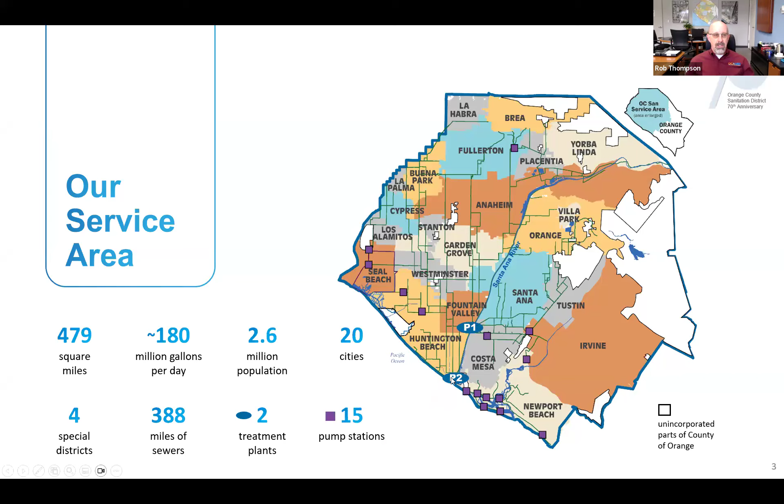But in general, we collect about 180 million gallons per day from 479 square miles. We service the 20 cities you see here, 4 special districts, which are Irvine Ranch Water District, Costa Mesa Sanitary District, Midway City Sanitary District, and Yorba Linda Water District. We have 388 miles of sewer. These are generally going to be the bigger pipes, anywhere from 18 inches all the way up to 10 feet in diameter. We have the 2 treatment plants here in Fountain Valley and in Huntington Beach. And something that we probably don't talk enough about, one of the most important assets in Orange County, our outfall, which is a 5-mile long outfall, which allows us to make sure that brine that we're now making from all the reclaimed water is safely discharged and maximizes our ability to reuse the water.

Again, a little bit closer view of our facilities. On the extreme left, you will see our new headquarters area. This is the nighttime rendering. It is nearing completion. For those of you that get a chance, probably in the summer, good time to stop by and see the new building. It's a mass timber structure. It's going to be beautiful and very, very effective. We saved quite a bit of money with the mass timber construction, actually. It's much lighter than concrete and steel, so we saved significantly in soil preparation and foundations.

So both beautiful, warm, and efficient. But the heart of what we do are treatment plants. As many of you already know, our Fountain Valley plant is here shown bound in yellow, and the Orange County Water District is right here co-located. We share a campus. That's part of our cooperative nature together.

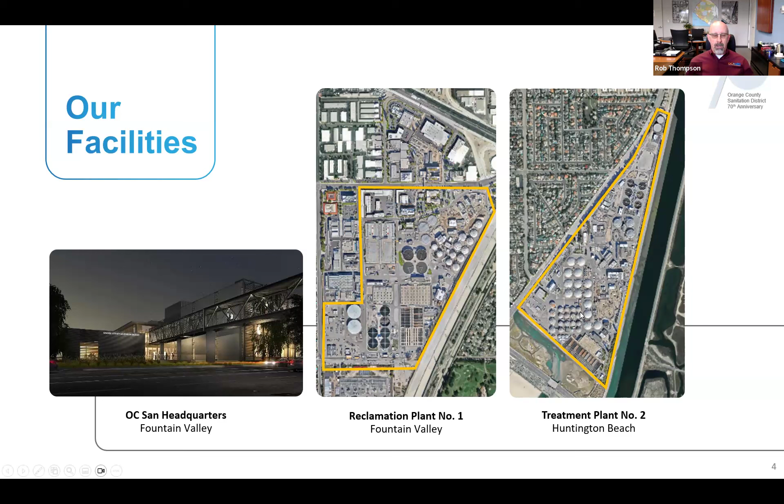Plant 2 in Huntington Beach is right here. It's about the same size, different shape as Plant 1. They're both about 100, 110 acres. Both treat about 320 million gallons of wet weather flow for a total, if you do your math right, 640 MGD. And our 2 outfalls can handle that, along with our 3rd outfall, which is the groundwater replenishment system.

So our first job, what we started as an agency doing in 1954, and really as a joint outfall sewer agency from the 1920s, was protecting the public health. That is job 1 for us. We make sure all of that biohazard, all of that sewage stays out of the streets, stays out of the rivers, gets to our plants, gets treated, and safely discharged.

Now, over time in the 1960s, environmental movement kicked in, Clean Water Act. We expanded to becoming protecting the public health and the environment, something we take very, very seriously. We have been providing Class A beaches for years. I've been here 28 and a half years. Since the 1990s, we've had A ratings on our beaches, really past the 2000s.

Beyond public health and the environment, we're now really moving into maximizing water reclamation and resource recovery in general. But water reclamation, as you heard, our partner, the Orange County Water District, we work hand in glove together. All the water that we collect, we're working hard to make sure it's reclaimable and made available to OCWD. We work hard to make sure we're a good partner, meaning the water quality we provide them is consistent.

It matches their needs when they're running their membrane filters and the different flavors they have. Our consistent effluent is the key to them having good success running those filters. So we take a lot of time and effort to do that. And it is the largest plant of its kind in the world, and we're happy to be involved. You can see the pictures of the general managers over time that really made the thing work.

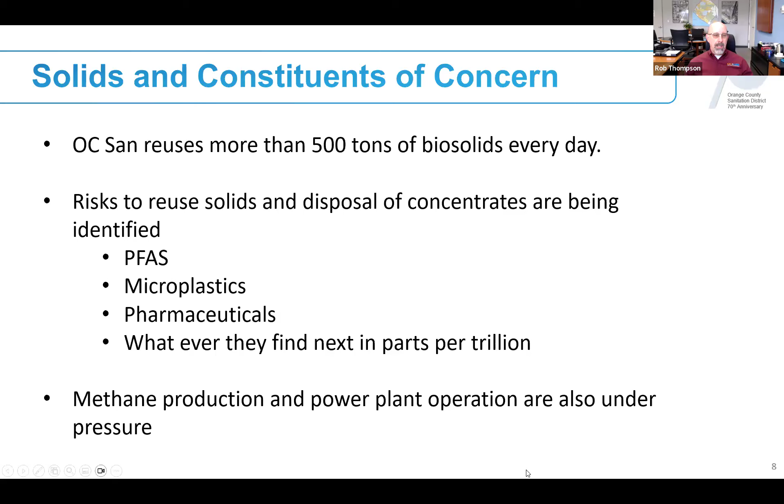First thing we try to do is source control. We have a fantastic source control program. The best way to have something not in the wastewater stream is to never let it in the first place. So our source control folks are always sampling. When we find a constituent of concern that's high, out of the normal bounds, they're great sleuths. They do their sewer detective work, and they work really hard to identify where it's coming from and then work with the dischargers to make sure that that's limited.

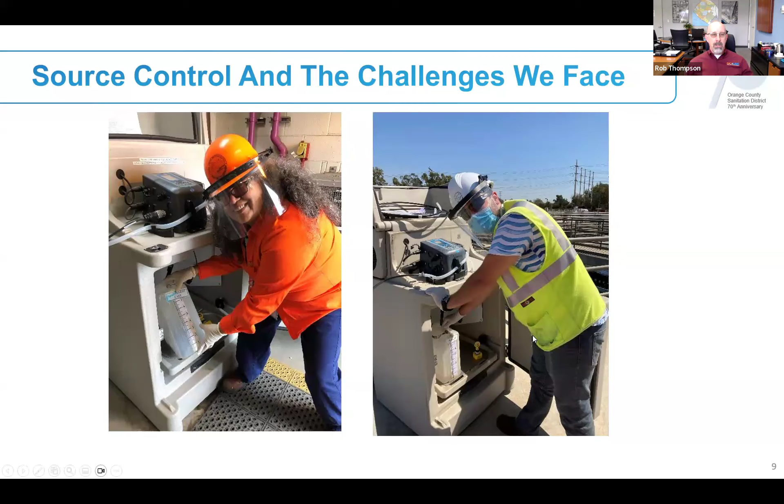It's something that we really kicked up over time when we started GWRS, especially because we understand that their work is not only for ocean protection now, it's a function of public health, making sure the water we drink is safe. However, there are certain things that no matter how hard we try, they're going to come into the sewer, and we need a paradigm shift.

I think everyone in this industry has kind of grown up from the 1960s forward, hearing the old slogan, the solution to pollution is dilution. Well, I am here to challenge that tried and true notion and say that the solution to pollution is definitely not dilution. I think going forward, the solution to pollution is concentration and destruction.

So our job, I think, going forward is going to be to find ways to concentrate whatever these constituents of emerging concern are, these health hazards that have been identified or are concerns, and destroy them. We can't just stay in the business of moving them around. So taking PFAS, putting it in some sort of media, and then sending it away. The point is, I think the industry is going to come to the conclusion that there is no away.

For us, biosolids tend to be one of those sticky substances that microplastics and PFAS stick to. We see some concentration there. So that's why OC San in our work program is looking for a way to take care of that concentration of either microplastics, pharmaceuticals, and or PFAS, and destroy them. So how are we going to do that? I'm so glad you asked.

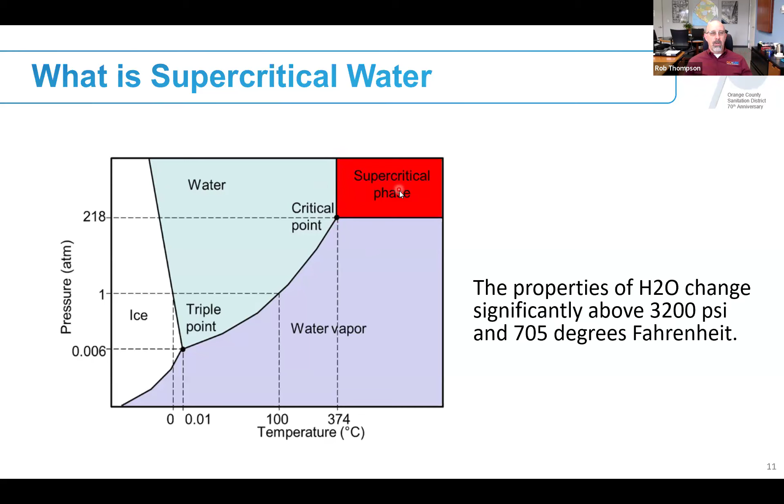So the machine we're going to trial looks something like this. First step is you have an air compressor. The air compressor, very standard. Yes, it's high pressure, but it's not exotic. It's not very difficult to find an industrial compressor that can go up to 3,400 pounds per square inch. In fact, if you go to Home Depot and go to the aisle where the pressure washers are, it costs you a couple $100 to buy a 4,000 PSI pressure washer.

So we compress some air. We put it through a heat exchanger where we're going to take heat that we've created by oxidizing the sludge or organics that we're talking about. So this is free heat. You end up with this hot pressurized airflow that goes to this point.

Separately, there are some pumps that pressurize the organic, either biosolids or raw sludge or food waste in our case. Take that sludge. It's still relatively cool, no big deal. We like that because sludge is super complicated, and trying to heat up sludge over time will turn it into tar and get you into problems with viscosities and how it moves. So suffice it to say, compressing sludge, no big deal. I do that every day. I take my biosolids, put them in a concrete pump just to pump them to my truck loading facilities, as many of you know. So a few thousand PSI for wet sludge, not a difficult proposition.

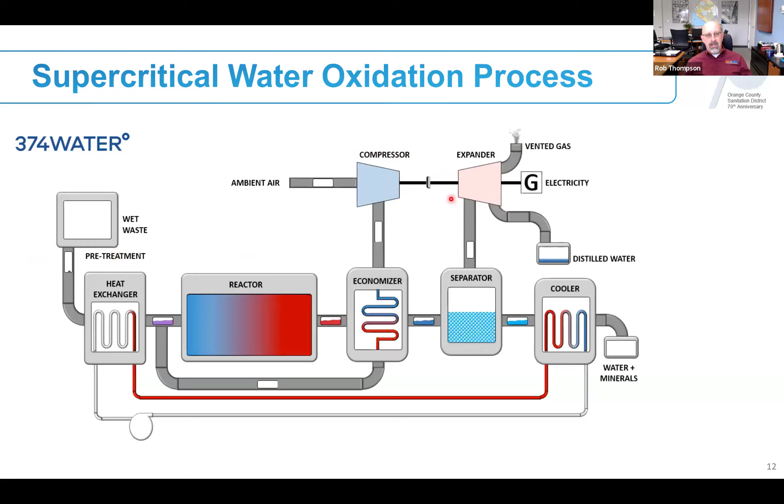So that's how the machine works. I know it took a lot to say it, but it's really, in the end analysis, pretty simple. Air compressor, sludge compressor, expander. Those are the big moving parts.

The question is, well, what happened to all those nasty things that might have been in the sludge? You had PFAS, what happened to it is a big question I'm asked. So if you take PFAS and you run it through this, you will end up with CO2, because PFAS is really a carbon fluoride chain. The carbons will break apart, combine with the oxygens, you'll get CO2. The fluorides will break off, and you'll get calcium fluoride. So calcium, very prevalent in the mix.

For the real chemistry geeks in the crowd, if you think about your periodic table, all those 2 columns, 3 columns to the left side of that periodic table, your alkali and alkali earth metals on one side are going to combine with your nonmetals and halogens on the opposite side of the chart to make a bunch of salts. So as you look down this chart for products, you'll see a lot of salts, for phosphates, for sulfur compounds, for fluoride compounds. You'll also have nitrogen gas coming off.

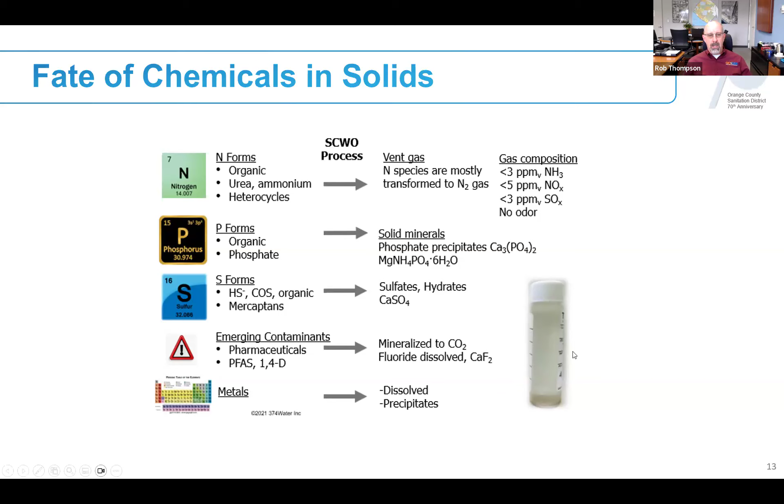So the process is very efficient at breaking up ammonias, very efficient at breaking up fluorine compounds, PFASs, pharmaceuticals. This machine just sees them as fuel. Microplastics, no big deal. That's just carbon hydrogen bonds. So you'll end up with carbon dioxide and water. So you end up with a pretty clean water compound with some salts sitting on the bottom of the beaker.

So what's our machine physically look like? The machine is being constructed, and it's actually being tested in Indiana right now. So this first set of views is the sludge preconditioning. Sludge is an incredibly difficult media to work with. Even in today's world, we spend an inordinate amount of time working on our solid systems, whether it's centrifuges, digesters, truck loading systems. It's a very gritty, difficult to handle material. So we spent a lot of time making sure that our system would be able to handle the contaminants that we're dealing with. There's all sorts of, use your imagination, latex products, sand, pebbles, grit. It's a very difficult medium to work with.

So the first thing we do is grind everything. There's a macerator in the corner. After everything is all ground up, we put it through a screener. So the sludge will come through. There's a fine screen. It'll let through anything less than about 2 millimeters. Anything bigger than 2 millimeters falls in this diaper genie. Or if you're a purist, it's an endless bagging unit, but I prefer diaper genie. Keeps the odors down. The sludge then passes through to this holding tank.

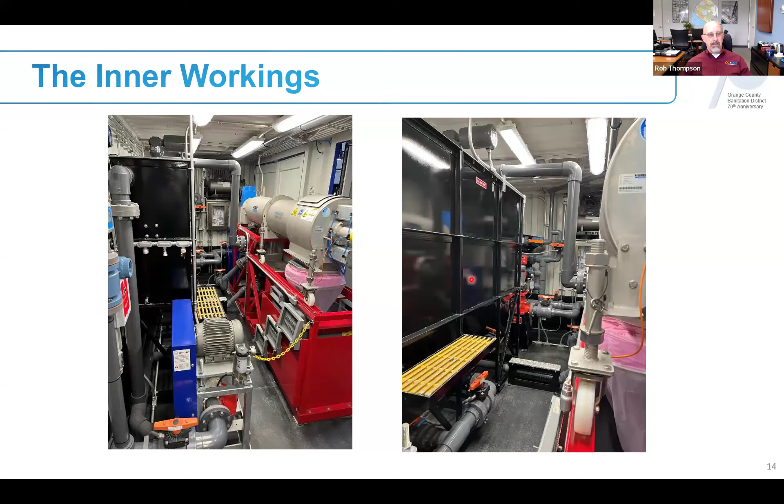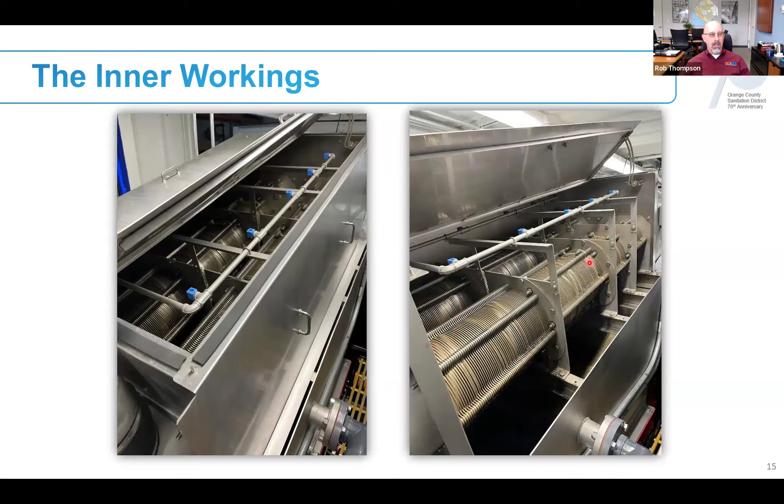Then we go to a screen press. We compress the sludge up to about 16% solids. So it's 16% solids, 84% water. And then we ship it over to our second container, which is where the magic happens. So this loop right here is our reactor. It's a very complex piece of equipment, which is basically a pipe going around in a circle. These items on the side are those heat exchangers that I was talking about. They're basically pipes within pipes, very efficient, straight pieces, prevents a lot of plugging issues.

Very simple layout, very simple idea to get done. Where 374Water is really providing their know-how is in how it's all controlled, the geometry of how things are put together and mixed. A lot of work has been done. They've learned a lot in the past year and a half in how to build the machine to run effectively and efficiently. And I am here to say that I'm very pleased with how this is going forward. And we expect to see the outcome very soon, which I'll show you in a minute.

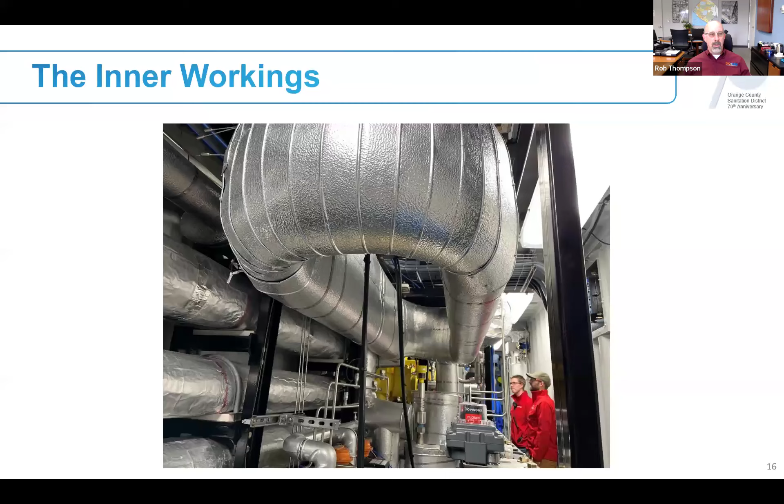The output looks something like this. This is the actual output of the unit right here. So the water's coming out. This was a video clip, but you can see that sandy, salty material down here at the bottom of the sink. They caught a cup of it. So it's water with these floating salts and precipitates. It looks very rusty because West Lafayette, Indiana, which is supplying the feedstock for them to test with, is similar to OC San in that it uses a lot of ferric chloride for enhanced primary treatment. Works great for us from a process perspective and just becomes a nutrient in the salts that are left.

So this salty stuff that will be able to settle out, we think, pretty readily, will be high in potassium, it'll be high in phosphates, it'll be high in iron. So there's no reason to believe it won't be a pretty good fertilizer. It'll be totally devoid of anything alive because at 3,400 pounds per square inch and 750 degrees Fahrenheit, not too many biological things will last. So it's a great outcome for us. This handsome gentleman you see here with his hand in front of what feels like a dryer vent, this is the warm, moist air coming out of that expander area.

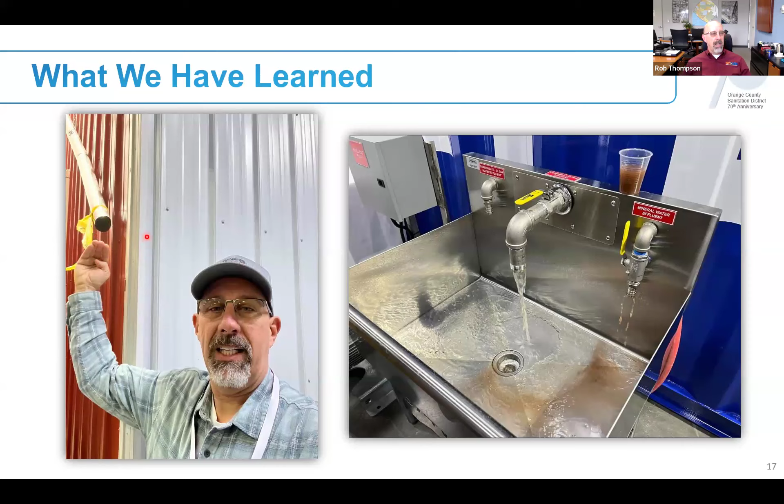So does it work? Yes, it works. This is a couple of beakers. This is what went in. This was the original SCWO testing at Duke University on the original 1-ton unit. So OC San sludge, I think this is actually biosolid, so it's even better than sludge. This is OC San biosolids, and this is the effluent water that came out.

We had to do AQMD testing because South Coast Air Quality Management District wanted to make sure that what we were doing just didn't put PFAS into the air. They wanted to verify destruction, and they wanted to verify that what was coming out was safe. So we looked at NOx and SOx and all the things there, and got very, very promising data. We submitted that with our application and received our permit.

So we're very, very bullish that this is an opportunity for us if we can make this work with 374 Water. It's a solution to microplastics. It's a solution to PFAS. It's a solution to pharmaceutical products. This is a way for us to morph away from digestion, maybe in the long term completely, or to augment digestion. We're still figuring out what the right way to utilize this technology is for OC San.

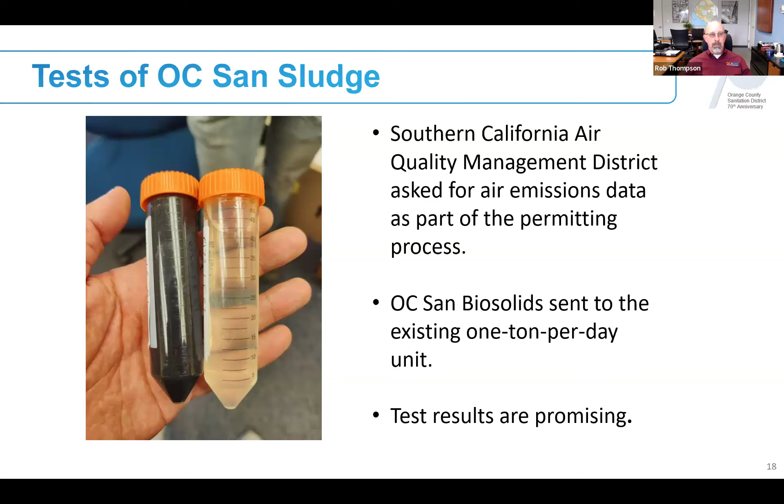But the upside is it solves a lot of the problems we may be facing in the future. So we're very, very interested to see how it's going to perform and how we can modify our process with this new tool in the toolkit.

The project budget is about $8 million. It hasn't really moved much. We had a couple of extra change orders on the site prep. It's noise, a couple of percent. But in general, we're at that $8 million investment. We're very happy to say and thankful to Congressman Lou Correa for partnering with us after the fact. He earmarked some funds toward us for a little less than $3.5 million to help offset.

But OC San is so interested in making sure we have a way forward that we're willing to invest this money and show the industry that supercritical water oxidation has promise and could be a part of the way we all move forward. Certainly, OC San is looking at it as a way for us to move forward with all the constraints that are coming on biosolids and methane production.

The site has been prepped. We're ready to go pretty much. We're waiting for the units to be delivered. 374 Water, I talk with them about every 2 weeks now. They are in the process of doing their commissioning tests. They're making a couple of modifications based on their latest learnings, but we anticipate in mid-March they should be moving toward their factory acceptance testing, where they run it for 48 hours at its designed capacity.

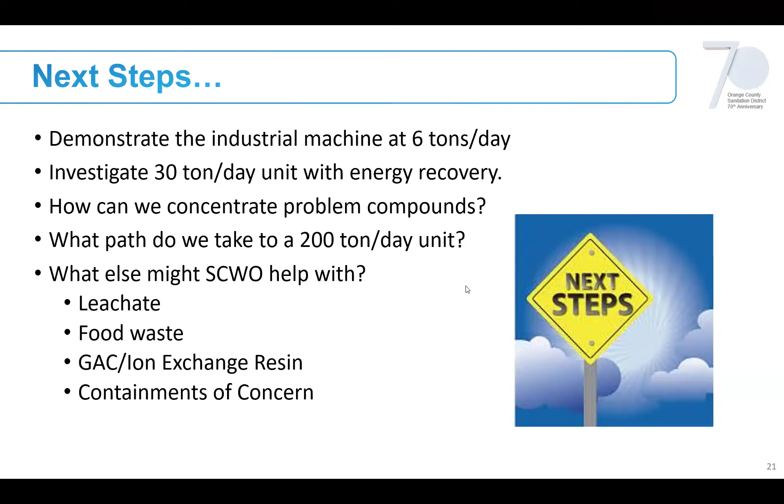Thank you, Rob. I've got a handful of questions related to cost and energy consumption that I thought we could tackle together. Do you have a sense of, is there a difference in costs based on what maybe a current process is versus the supercritical water oxidation process, or what are those costs? And then if you could talk a little bit about energy consumption as well.

I have been very hesitant to make any kind of representations about cost because we have all worked in the machine development world or new technology development. I want to wait till this thing is ready. The first step is, will it work? The second step for me is, okay, then how much is it going to cost when it's actually operating as it should operate? You can make all sorts of pie in the sky guesses and estimates, but I would never want to tell anybody that I feel confident that it's going to be one number or another.

Directionally, I believe it's going to be cheaper to operate overall than a classic digestion with all of its mixing and energy costs and heating, and sludge dewatering or thickening, which we have here, and truck loading and hauling and reuse of biosolids off-site. I think there's a lot of opportunity for this to be much more effective and efficient.

I think it's got a much smaller environmental footprint because I'm not running 25 diesel trucks from Fountain Valley to Arizona or Fountain Valley to the Central Valley. I reduced that volume of trucking by a factor of 20. So maybe a truck and a half, and that truck and a half is going to have that sandy, silty, high phosphorus, high iron amendment that I could use anywhere, whether it's a golf course or a park, potentially.